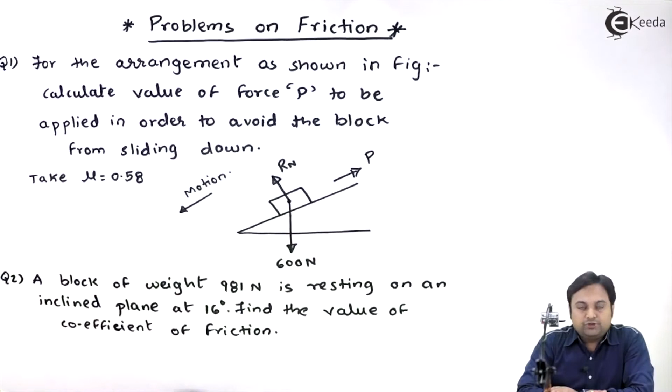Let us take some problems on the topic of friction. I am marking question number 1. We will read this question first. For the arrangement as shown in figure, calculate value of force P to be applied in order to avoid the block from sliding down. Take mu is equal to 0.58.

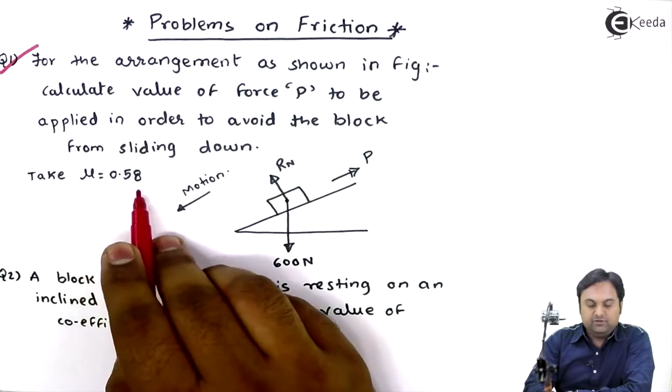Here the diagram has been provided. So this is a question of friction and we will write the data for this question. We have to write the data for question number 1. Here the diagram is given first of all. Here we have an inclined plane whose inclination is given as 40 degree. This is 40 degree.

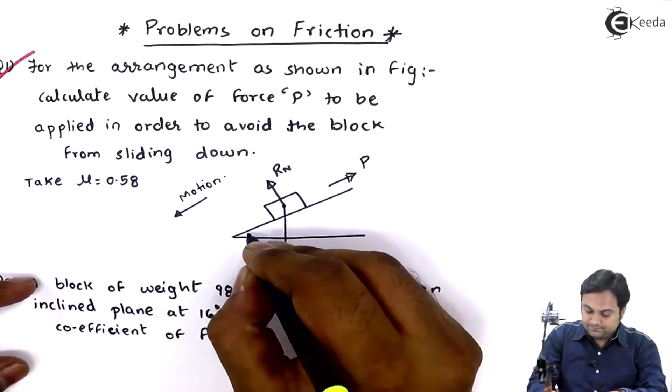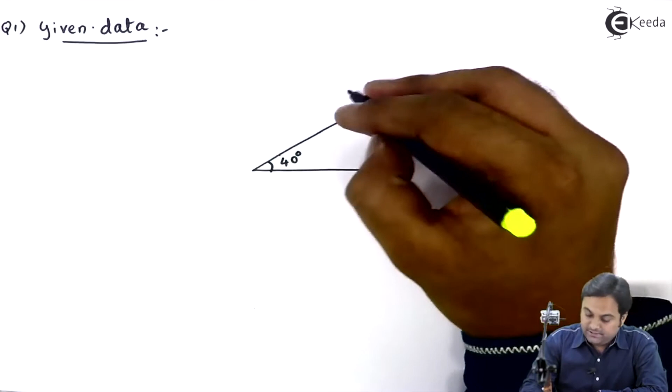Over this 40 degree inclined plane, there is a block kept. The weight of this block is acting in the downward direction. Its value is given as 600 Newton. Next, here we have to calculate the force P required to prevent the block from sliding down. Now, what is the meaning of the block sliding down? If you look at this diagram, here we have weight 600 Newton acting downwards.

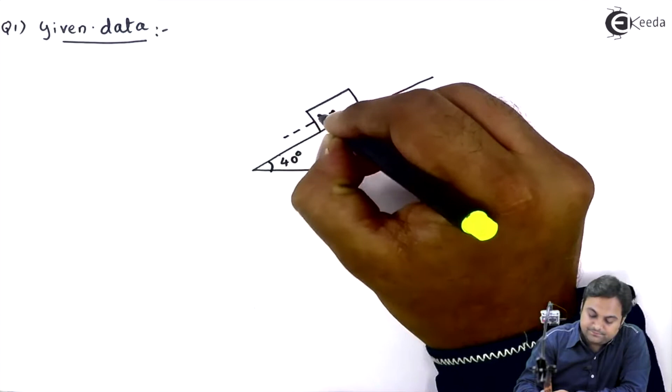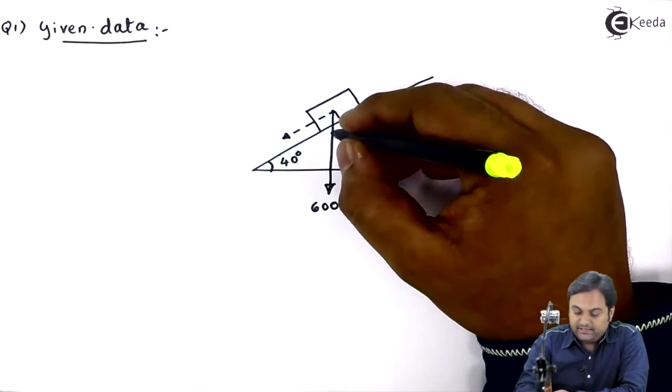Since this weight is acting downward and it is applied on an inclined plane, this 600 will have two components. One will be parallel to the plane and the other component will be perpendicular to the plane. Now, we need to know the angle made by this force, or you can say weight 600 Newton, with respect to vertical. We need to calculate this angle.

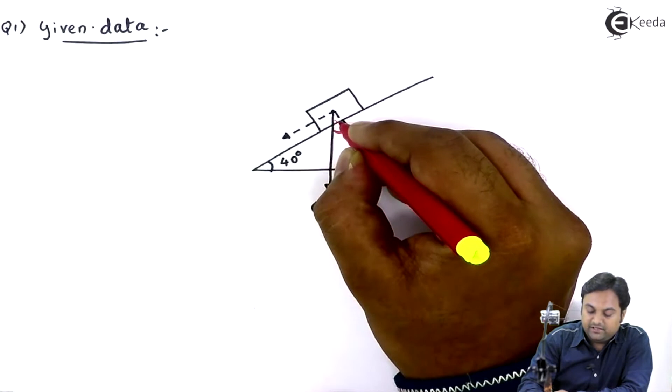Now, see here, if this angle of the inclined plane is 40 degree, here we have this as 90, so the remaining angle becomes 50. Even this vertically opposite angle is 50 and here we have 90, so the remaining angle becomes 40. This is 40 degree. Means weight is making an angle of 40 degree with vertical.

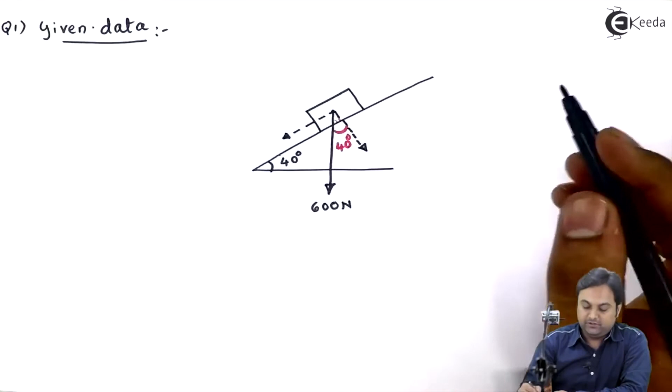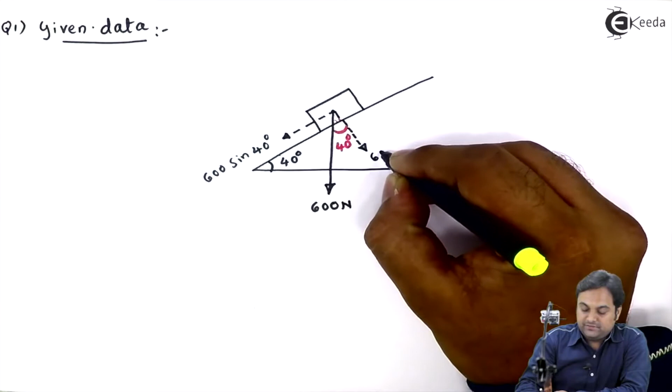Now we will have two components of weight 600 Newton. The first component is parallel to the plane. This parallel component will be given by 600. Since inclination is with vertical, so this will be sine 40 degree, 600 sine 40 degree. Next, the perpendicular component, this will be 600 cos 40, it is 40 degree. I hope you all are getting this.

Now, since the component of weight 600 cos 40 will try to keep the block in contact with the plane, opposite to that we have normal reaction which is called as R suffix n. Now, because of 600 sine 40, the block will try to move in the downward direction, but there will be one friction force which is called as F is equal to mu into Rn. This is the value of friction force.

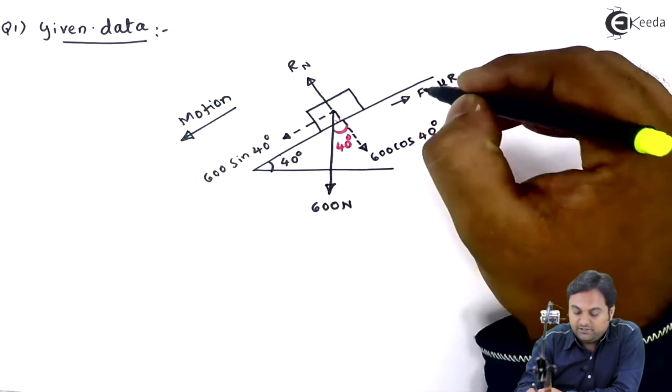This friction force will try to keep the block in the opposite direction to motion because motion is in the downward direction. So because of 600 sine 40, this block will be sliding downwards, but friction force would try to oppose it. Now we need to find the value of force P, which we will be applying in the upward direction so that the block does not slip down.

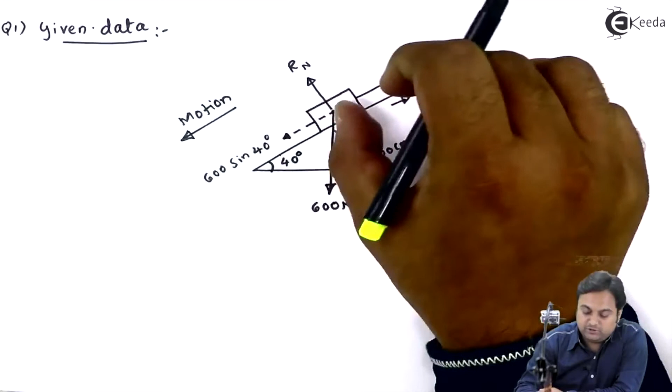So this is the question wherein we have to calculate what is the value of force P that should be applied in order to avoid the block from sliding down. Here coefficient of friction mu is given as 0.58. So these are the conditions which are provided in the problem. Now let us try to solve this question. I'll write solution here.

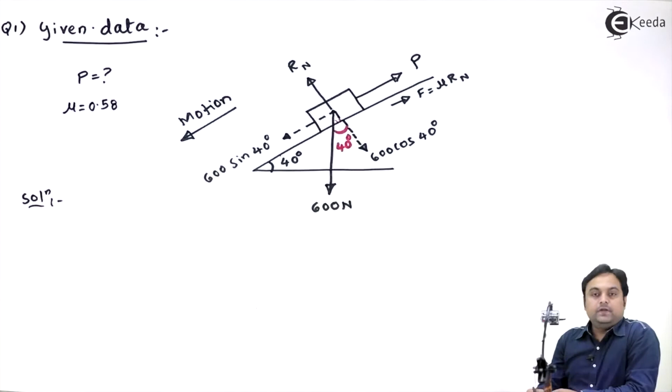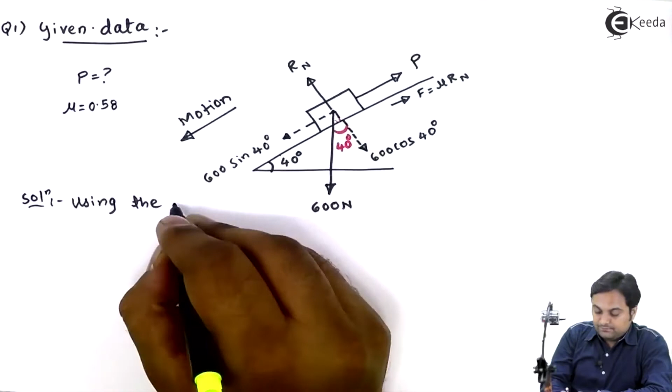Since we have number of forces here, for friction problem we have to start with the conditions of equilibrium. I'll say that using the conditions of equilibrium, here I will be using the equilibrium conditions.

First condition that I will be using, it would be called as summation of Fx is equal to 0, where all rightward forces would be taken as positive and all leftward forces will be taken as negative. While writing summation Fx, I will say that this is the sum of all forces parallel to the plane.

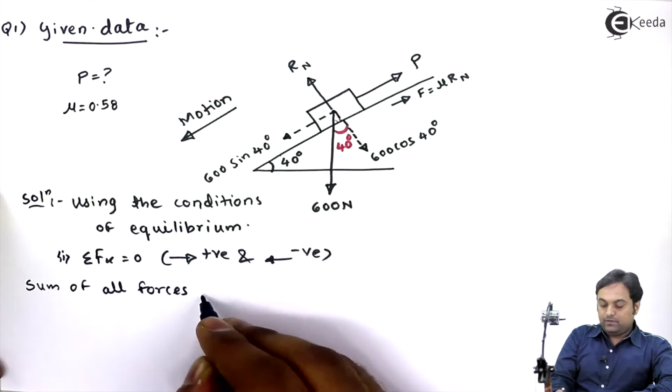If we look in this diagram, we have to just take forces parallel to the plane, add them, that will be our summation of Fx, and then we will be equating it to 0. So now I would be saying that therefore summation Fx is equal to, if we look for forces along the plane, the meaning is it is parallel to the plane. Here force P is parallel to the plane, F is parallel to the plane, and 600 sine 40 is parallel to the plane.

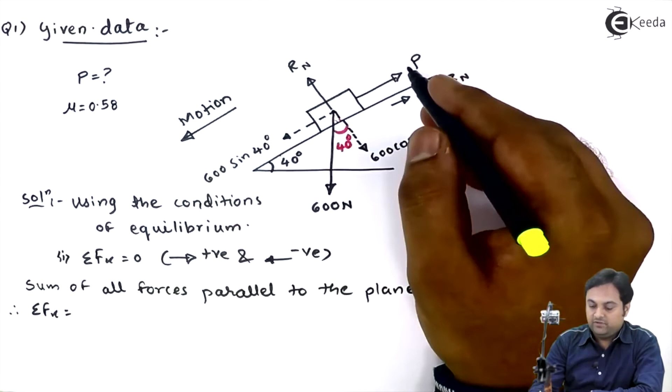So all upward forces along the plane should be taken as positive and downward forces should be taken as negative. So here I have P plus F minus 600 sine 40 is equal to 0, my first equilibrium condition. In this, I will be keeping P on one side because we want to calculate P, the value of force here, and I will shift these terms on other side.

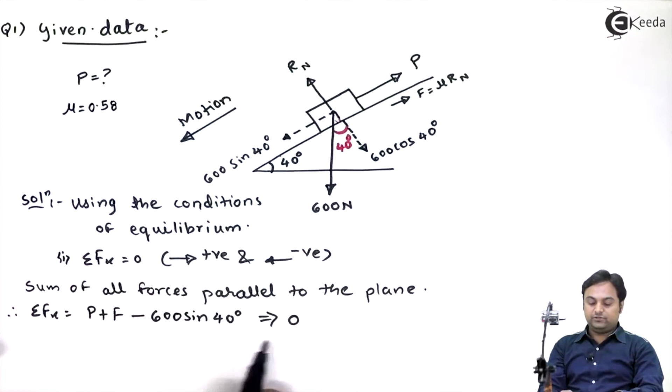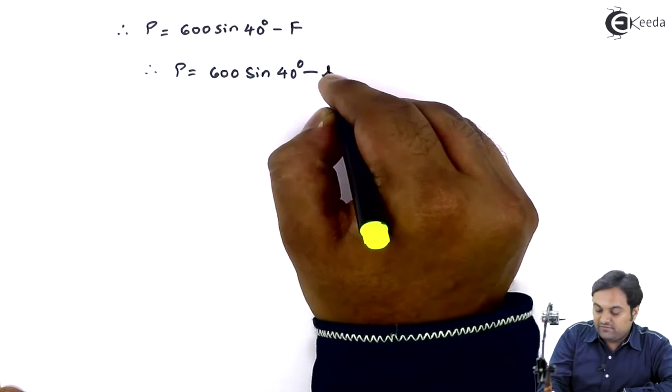So I will have this as P is equal to 600 sine 40 degree minus F. It means I have shifted 600 sine 40 and F on the other side of equal to sign. Therefore, I will say that P is equal to 600 sine 40 degree minus F. F is equal to mu into Rn. Here we have the formula in which we can say that frictional force is equal to coefficient of friction multiplied by normal reaction.

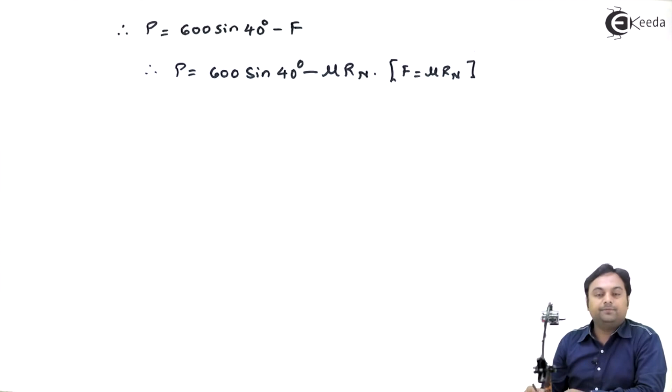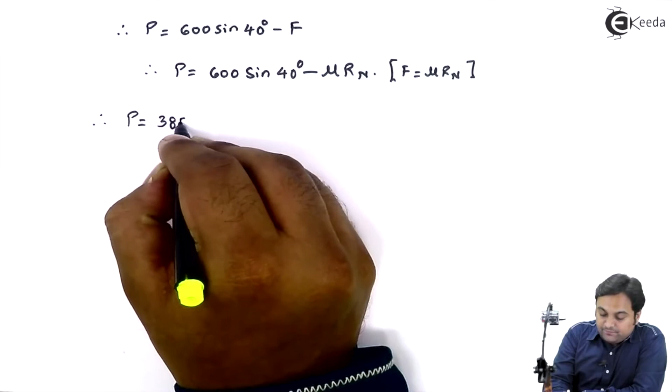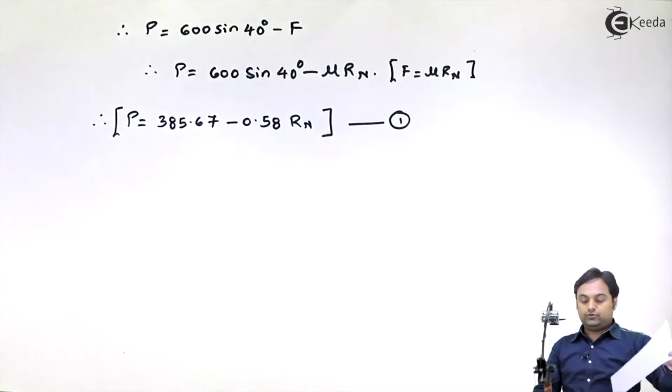Hence, capital P will be equal to 600 sine 40, the value which I have it is 385.67, minus mu, which is 0.58, into Rn, normal reaction. I'll keep this as my equation number 1. So from solving forces parallel to the plane and equating them to 0, I get an equation of P. And here in this question, they have asked us to calculate the value of capital P. So if we know Rn anyhow, then we can easily get the value of P.

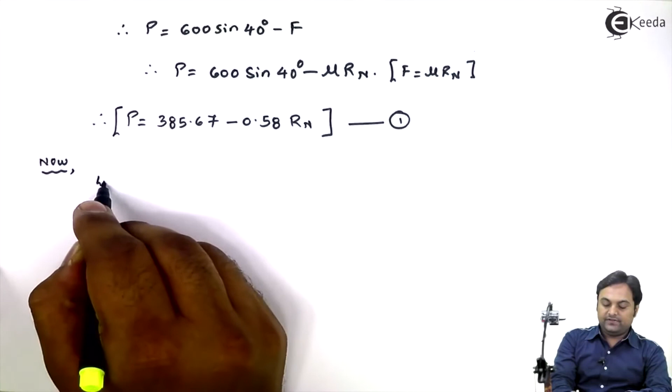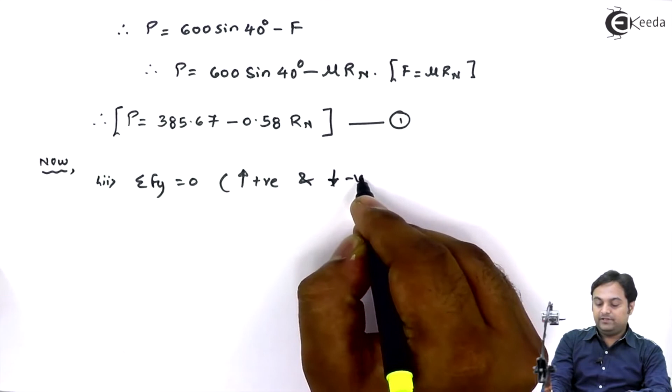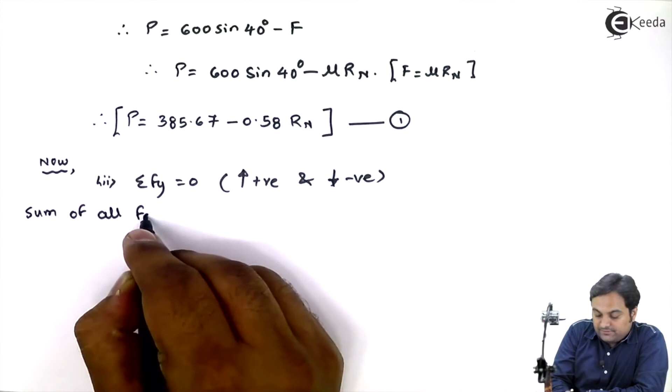So after using summation of Fx, I will say that now, using the second condition of equilibrium in which we have summation of Fy is equal to 0, upward forces will be treated positive, downward forces will be negative. So I'll say that what is summation of Fy? It is the sum of all forces perpendicular to the plane, and that should be equal to 0.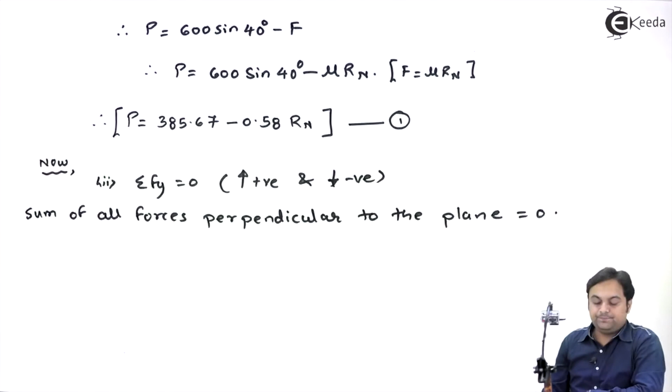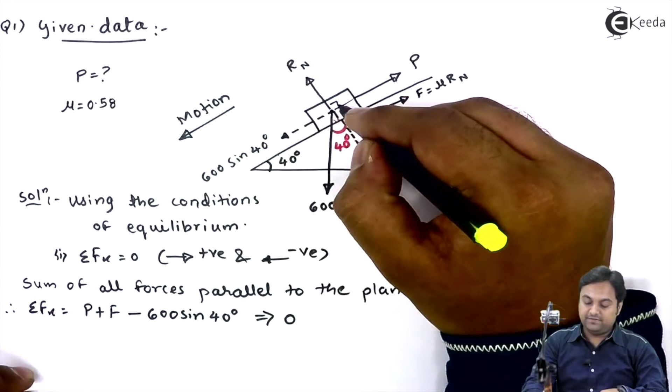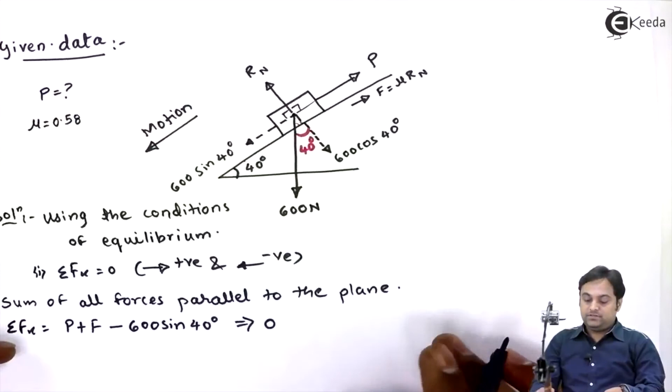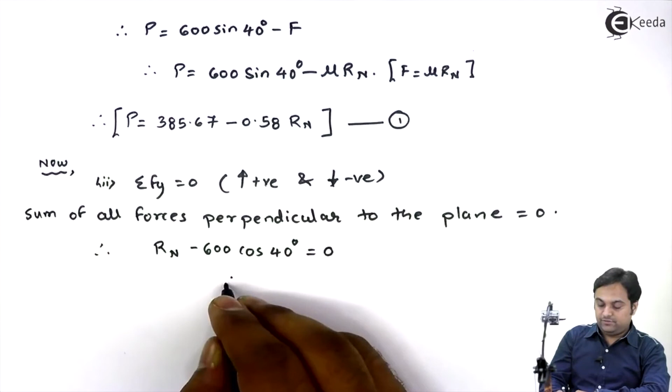Now if we look at forces perpendicular to the plane, here I have Rn, which is perpendicular to the plane. Rn is upward, so it will be treated as positive. Then 600 cos 40, it is downward, so it should be treated as negative: Rn minus 600 cos 40 degree is equal to 0. Therefore, I will shift 600 cos 40 on the other side and calculate the value. So Rn comes out to be 459.63 Newton.

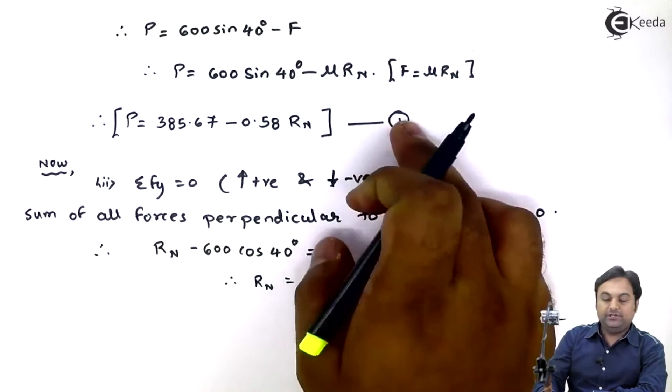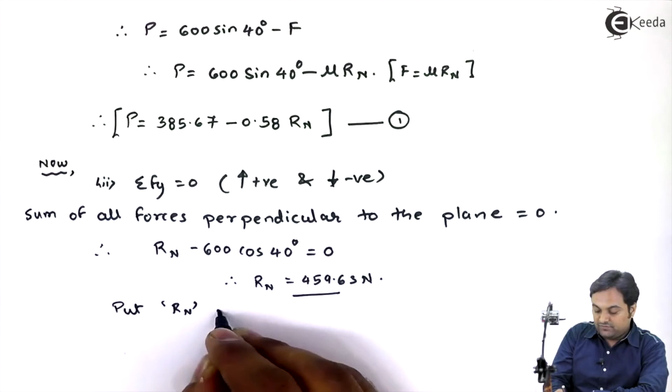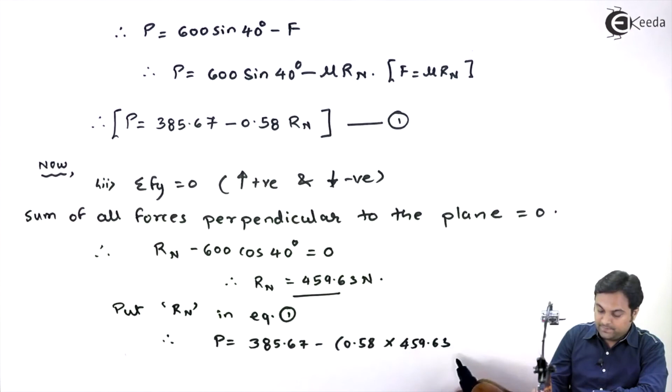Once we have Rn, we can put it in equation number 1 and get the value of capital P. So after getting Rn, I will say that put Rn in equation 1. Therefore, capital P will be 385.67 minus 0.58 into Rn, which is 459.63. Hence, if I calculate all the terms here, I will be getting my answer of capital P, and from this I can say capital P is equal to

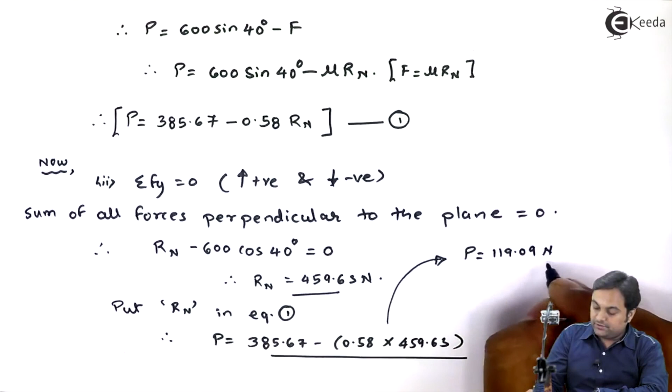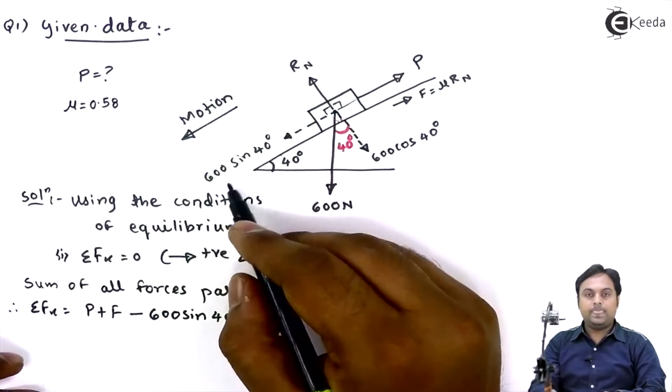119.09 Newton. And if we look at this question, it was asked to calculate the force P required to prevent the block from slipping down. So if we see this, the force that will prevent the block from slipping down is 119.09 Newton, and we complete the first problem.